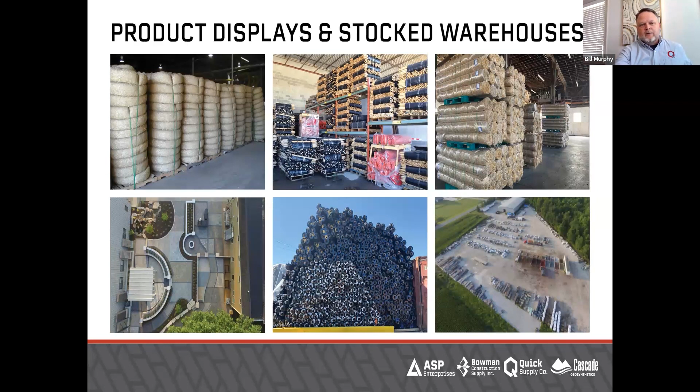Rachel, if you unmute yourself - I have your bio that I printed up, but I don't like to read things to people. I know you as someone from the Midwest who now lives in Colorado, but the engineering world is right in your wheelhouse, and you're an expert in erosion control and vegetated solutions. I think you have your states listed here that you cover, and you know us in all of those states and more. So everyone give a warm at-home clap to my friend Rachel Higgins. We can't hear them, Rachel, but trust me, they're clapping - they're thrilled to see you.

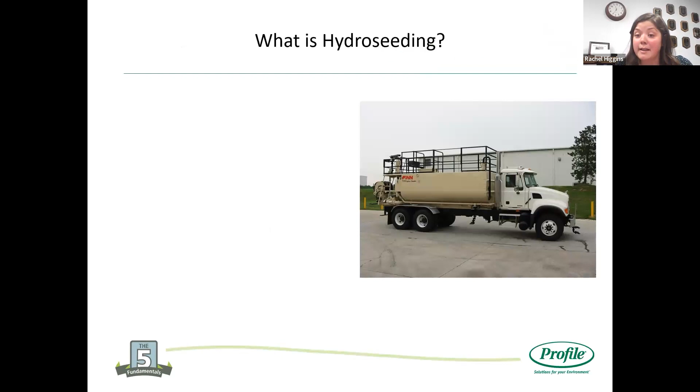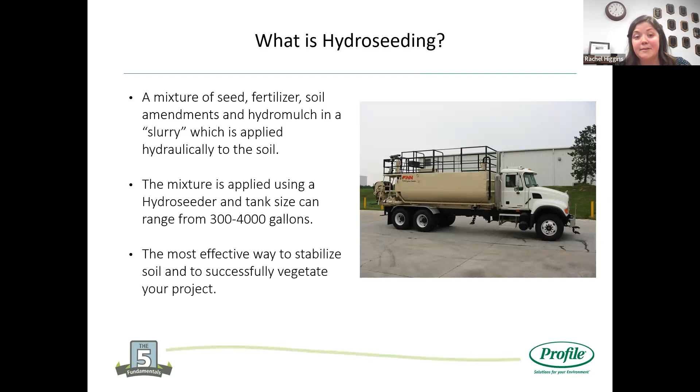The majority of the products we manufacture are hydraulically applied. So what is hydroseeding? For those who aren't as familiar, think of this as a mixture of seed, fertilizer, soil amendments, and our hydromulch, which is mixed in the back of a tank - a typical hydroseeder - and then hydraulically applied to the soil. These machines come in a wide range of sizes, capable of handling smaller residential jobs up to multiple acres, so there's a machine out there for whatever kind of project you're working on. Overall, this practice is a really great way to stabilize and vegetate a site with one application.

So a question for all of you at home, and I hope you speak out loud - if you had to think about it, what's the most cost-effective form of erosion control? Yeah, Bill probably knows.

He's seen this a couple of times, but he showed a picture of some of the BMPs that they stock at their warehouses. There's so many products to choose from, but really when it comes to the most cost-effective solution,

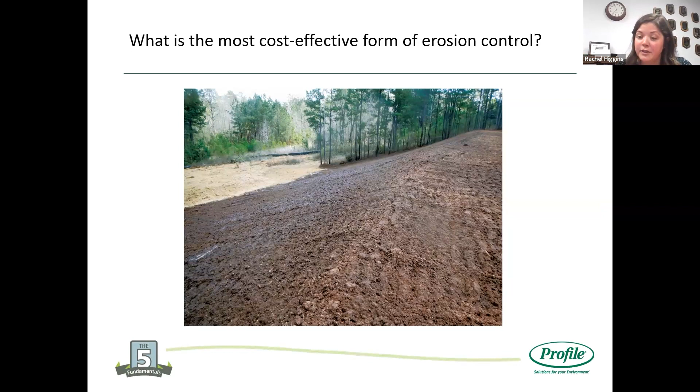what we're looking for is a vegetated solution. So we're using all these BMPs to encourage that or retain sediment, but overall, the most cost-effective form of erosion control is going to be getting vegetation to grow. So vegetation that comes back season after season, those roots are really going to keep everything in place. But in order to do that, we really need to take a look at our soil.

But as I mentioned, we're working on projects all around the world. I know we've got people from quite a few different locations here today. So how do we approach all of these projects? At Profile, we like to follow what we call our 5 fundamentals. Regardless of where you're at, we found that following this process is a really good way to set yourself up for success and eliminate having to go back out and redo these jobs. So that's what we're going to be going through today.

And thanks to the whole ASP, Bowman, Quick, and Cascade team, we've got some great case studies here at the end utilizing this process and these materials.

All right, so starting off, number 1, we really need to take a look at our soil. When it comes to erosion control, I know a lot of it comes down to making those selections and figuring out what's going to be best for the site. But as we just saw, the most cost-effective form of doing that is getting vegetation established. So we really need to take a step back and first address the soil before we even try and develop our seed mix as well as our erosion control BMPs.

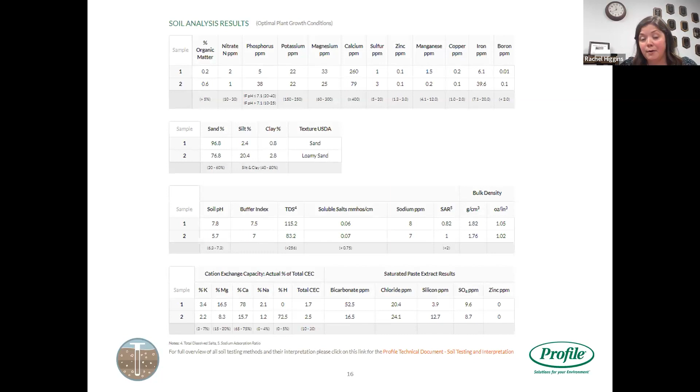But what this analysis is going to look like, we use a third-party lab in Lincoln, Nebraska, and we're really looking for our macro, micronutrient levels in our soil. We want to take a look at our pH, our organic matter, our moisture, our soil type. This can tell us a lot about the growth potential of the substrate or any areas of concern that we can then rectify.

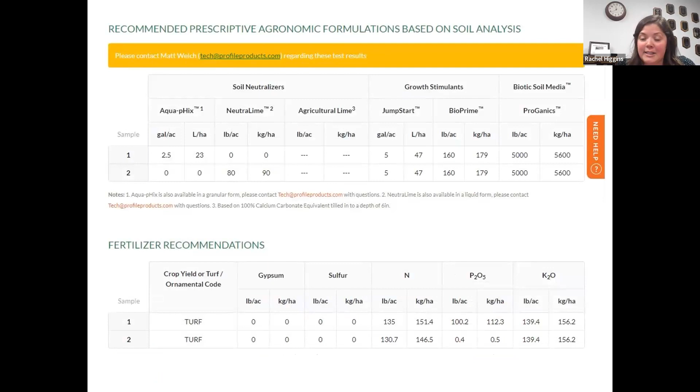And so one of the great things with this solution is we can provide results, but then actually prescribe some amendments to go with that. So again, really recommend getting in touch with your regional rep to go through an example of this on your own. Because let's say we start with the soil test, we know that's our first fundamental. What do we do next? So if we get this soil test back and we see that we are pretty deficient in nutrients or our pH is off, here are the most common solutions used on a majority of job sites to address that soil.

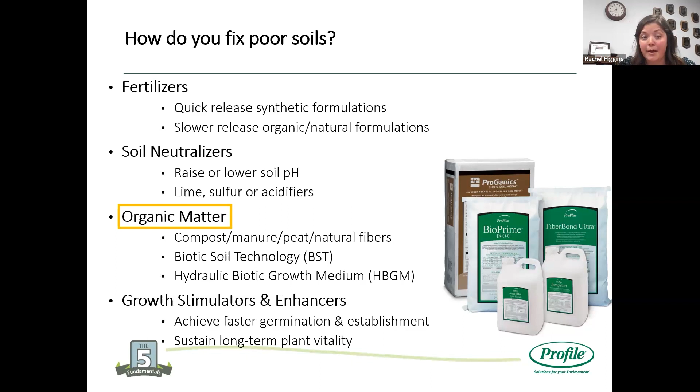And this is what we have on every single project, right? Yeah, probably not.

I wish it would probably make a lot of our jobs easier. Oh, ha ha ha, my laugh is not as effective when I'm muted. I appreciate it, I appreciate it.

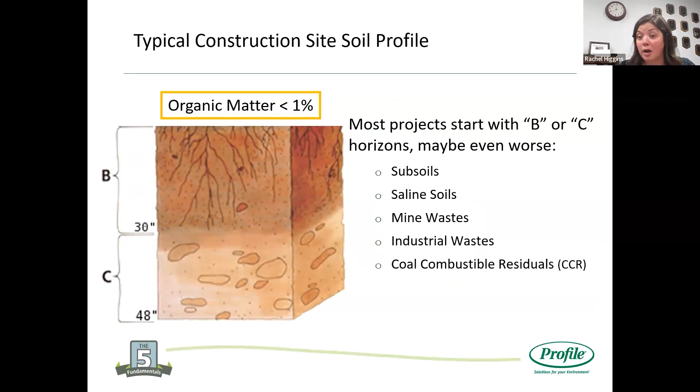Unfortunately, that's not the point on a majority of our reclamation projects. A topsoil layer was never there to begin with. Maybe it was stripped away and taken to another job site. All that to say, when we finish up a job and we're getting to that seeding component, we have less than ideal starting conditions to get that seed germinating.

Another really important thing to keep in mind with organic matter, we know it's a healthy component, a key component of our healthy soil. But if we see this from the USDA, healthy soil has an amazing water retention capacity. For every 1% increase in organic matter, it can result in as much as 25,000 gallons of available soil water per acre.

Like I told you guys, I'm here in Colorado today. I'm sure in most of these regions, moisture is critical to the long-term success of these sites. So we know it's a key component of healthy soil, but there's countless benefits that it can also provide. We know organic matter is important, but how do we actually incorporate that into our project?

Some of the most common approaches would probably be topsoil or compost, still regularly used in the industry, but seeing the need for this led to the development of a new technology, which is a hydraulically applied biotic soil media.

The product our manufacturer calls ProGanics. This is designed as a functional alternative to topsoil and compost, and we can use that same machine that we're using for our erosion control, so it really helps with time of installation. As you can see here, it's hydraulically applied to the soil, much easier to apply on those steep slopes. Since the launch of this technology, we've gotten proven performance equal or better than compost or imported topsoil.

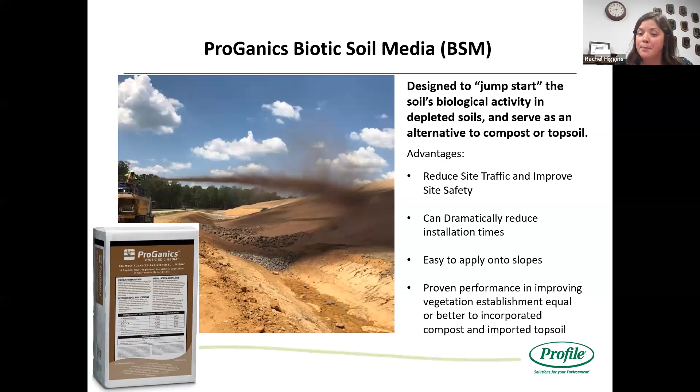So once this product is on the soil, it's going to help rebuild this O and A horizon in place. With this concentrated formula, we can apply 5,000 pounds of ProGanics biotic soil media and provide the same amount of organic and soil building components as 36 loads of rich topsoil. So we can provide quite a bit of time savings of having to haul in and spread all this outside material.

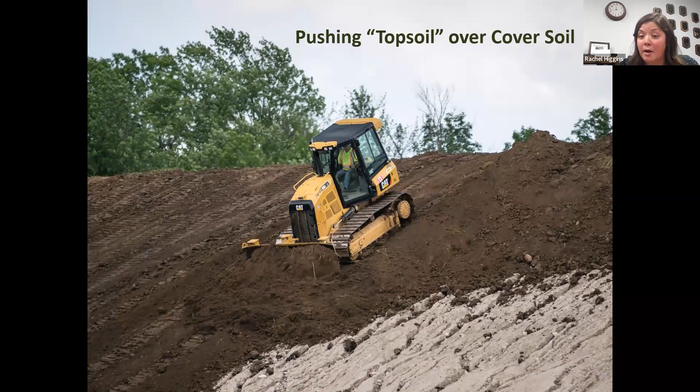So when it comes to sites where we need to improve our organic matter, think of ProGanics. It's another tool in your toolbox and a great option for these sites. Compared to the more conventional methods of pushing out topsoil or blowing out compost, we can now replace that with a hydraulic application. Just showing you how easy this is to lay down. We've got quite a few case studies utilizing this across the country and around the world that we're looking forward to getting into soon.

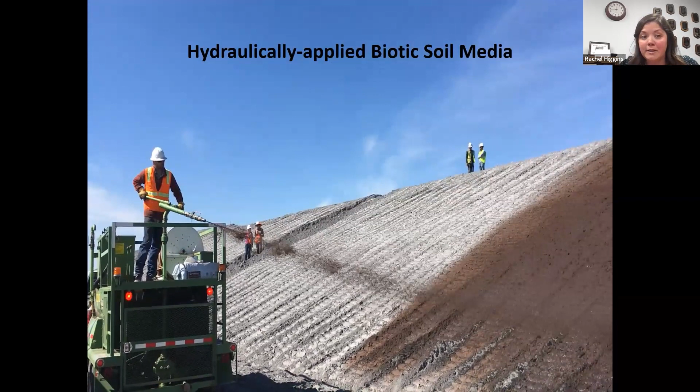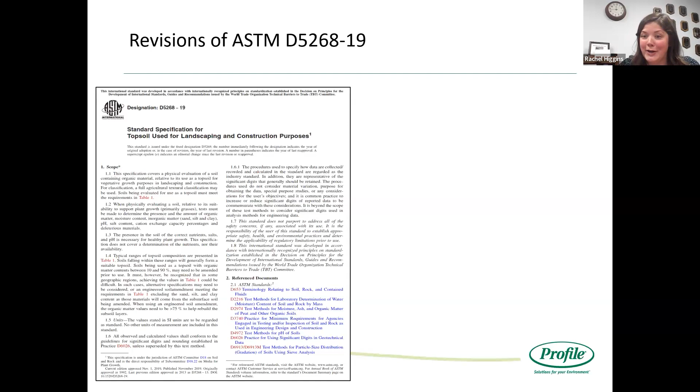Just for reference, in terms of how to spec this product, a lot of DOTs have already started to incorporate this type of technology into their standard specs, but I know we're kind of all over the country right now. For your reference, ASTM International recently revised their own topsoil spec, but they recognize that's a limited resource. So they've introduced and defined a hydraulically applied engineered soil amendment as a functional alternative to topsoil, and ProGanics does meet this spec.

Again, if we have some sites where we're really struggling to establish vegetation, or we know we need to give it a little bit more of a boost to get that germination, consider ProGanics as another tool in your toolbox.

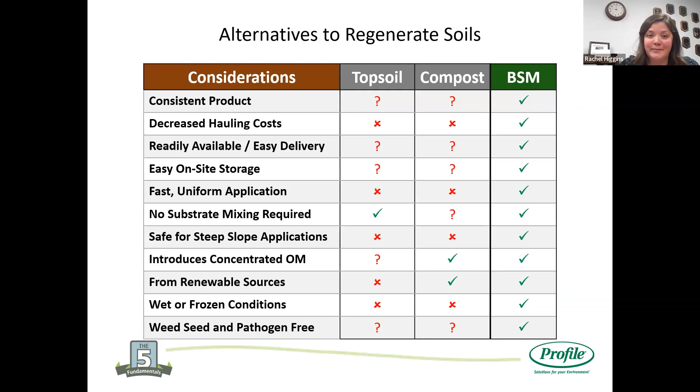All right, so moving along to fundamental number 2: once we've fixed our soil, then it's really important to make sure that the seed we're using is going to be well adapted to our site conditions. There's quite a few things that we should keep in mind: what is our intention, what is the seasonality, what are our site characteristics, and how is this going to be maintained?

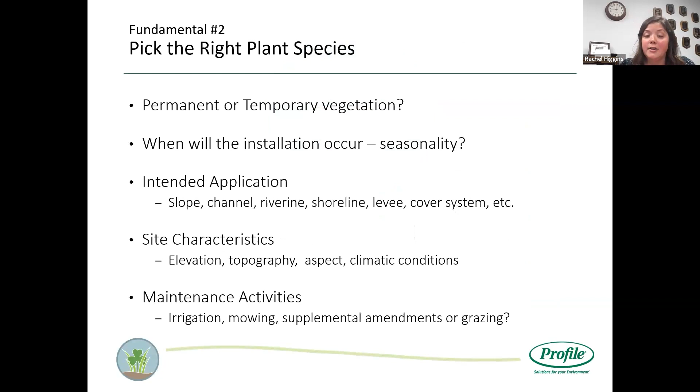There's quite a few things that we need to think about when it comes to that selection, if we have the ability to make that other than following the specification. That said, some things to keep in mind, some things that we certainly want to avoid: making sure that we're not using a mix that's not adapted to our site conditions, using an unbalanced mix, or we can also have an issue with using too much seed, or having too much cover crop in our seed mix.

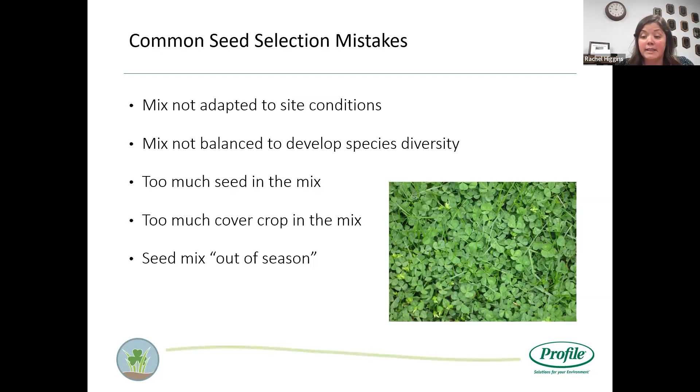From Profile's point of view, a strong recommendation for us is to get in touch with your suppliers and your local experts and make sure that we're using a great mix that's going to be well adapted to your site constraints, as well as the soil that we just tested from that first fundamental.

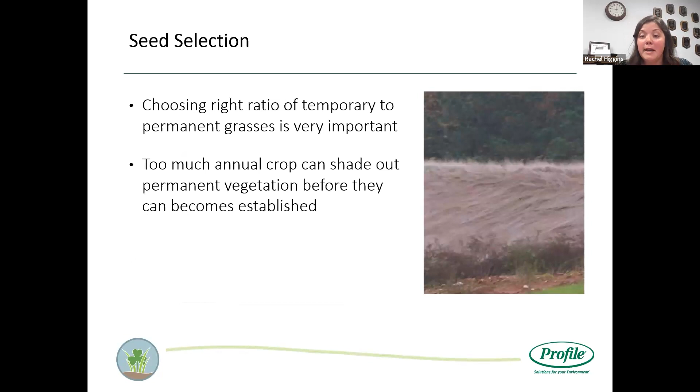Just really want to point out here quickly the importance of that ratio. We want to avoid that quick green effect that can come from using too much cover crop. We don't want that to grow out and choke out the permanents, because then we're going to be back to square one. So making sure that we're keeping an eye on that balance.

This picture, I know it's common sense, making sure that we're using the right mix in the right season, but projects can sometimes get delayed. So if that does happen, make sure that we're going back and dotting our I's and crossing our T's and making sure that everything we're putting out on this site is set up to thrive.

Once we've fixed our soil and then we've made that seed selection, then it's time to start thinking about our erosion control material.

At Profile, we like to think of it as finding a balance between our natural variables and our product attributes. By natural variables, we're talking about your site conditions - our soil, our vegetation, our water. Is this going to be irrigated, or are we dependent on natural precip? Keeping all those considerations in mind, we then need to find an erosion control product that can really complement those constraints.

Certainly, one aspect that we need to keep an eye on is the erosion control effectiveness - how well is this product able to prevent soil loss on our site. Another thing to keep in mind is our functional longevity. This can be really critical if we're going in with dormant seeding or if we're seeding with natives. We want to make sure that we're using a product that can provide that protection for an extended period of time.

Another aspect that we should certainly keep in mind is growth establishment. Because again, from the beginning, we know that the most cost-effective form of erosion control is sustainable vegetation. So we want to make sure that the products we're selecting and using on our job sites are actually going to encourage that growth as opposed to hinder it.

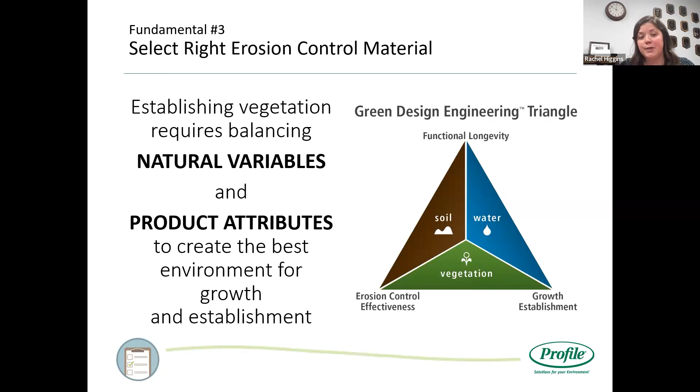That takes us into hydraulically applied erosion control products, or HECPs. HECPs are a great option for finding that balance with our site constraints, because they can be customized to your site-specific conditions. There is a wide range of HECPs available in the marketplace, so you can really help dial down a material that's going to be best suited for your needs, whether that's your slope gradient or how long we need the protection, and they can really help find that balance.

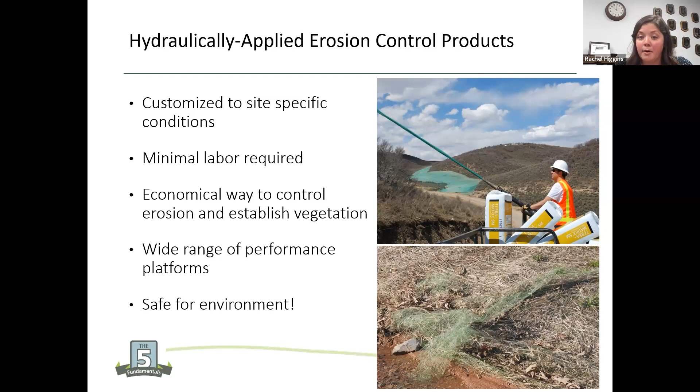This is a really economical way to control erosion and establish vegetation. It's much faster, easier, and safer to get down compared to some alternatives. But certainly one of the most positive benefits with HECPs is they are safe for the environment. All of our products have been tested against ASTM standards and EPA protocols. They're completely non-toxic and 100% biodegradable, so we don't have to worry about leaving behind any netting or staples on our job site.

A little bit more about hydraulics, if you aren't as familiar - think of them as spray-on blankets. Once we mix up this material in the hydroseeder with the water, we can spray it out on our site, and it's going to form a strong and intimate bond with the soil surface. The fibers used to create these mulches have a very high water holding capacity.

At Profile, we manufacture a line of hydromulches from North Carolina that are mainly wood-based, but we also manufacture some products in Rockford, Washington that are straw-based. Both of these options are a great way to protect the soil, but they're going to provide a lot of moisture at that soil level, which we've seen to really help speed up or encourage that germination.

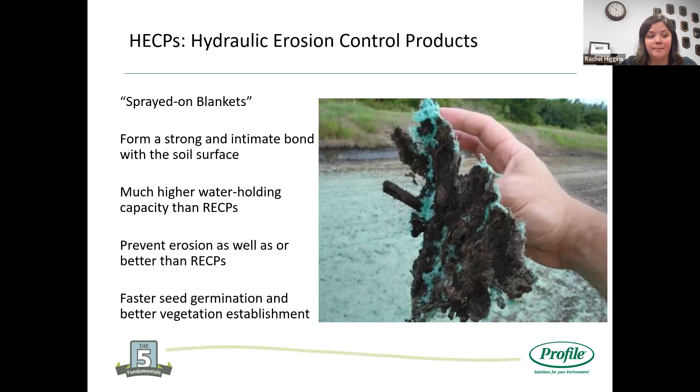Here we can see how that process goes. We're going to get those products in 50-pound bales, mix those up in the back of the tank, hydrate it with our water, and then this material can be sprayed from the tower or the hose out onto our job site.

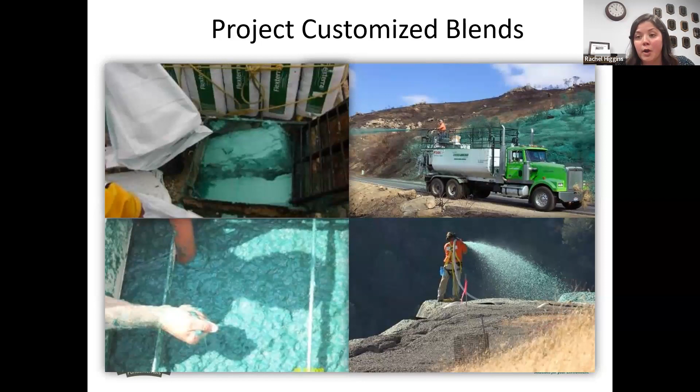So I mentioned that there's a wide range of erosion control products out there to choose from, which is great, but then it can be a little difficult to actually hone in on that decision. So how we make recommendations for these products is through performance testing.

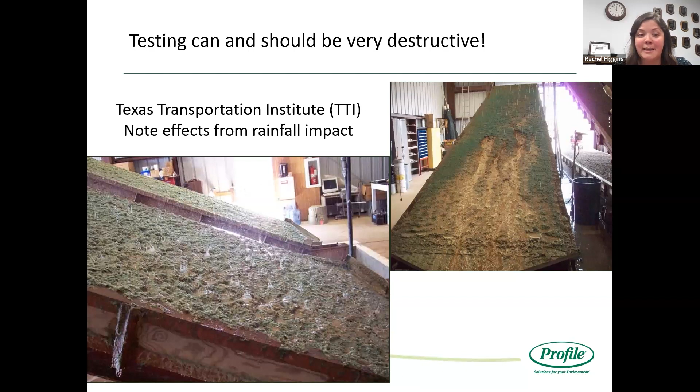So we test all of our products at quite a few laboratories. We really like to use Texas Transportation Institute because they can create some really consistent large raindrops, which again is great to see that destruction in a controlled setting. Because then from there, we can now rate our performance.

So what we have here is a performance profile for these recommendations. Essentially, if we start at the bottom, if we're working on a site where we're not expecting a lot of erosion, it's a pretty flat area, we're seeding at a good time frame, that's where we can go in with the low-end product. At profile, we like to think of it as a good, better, and best approach. So a good option would be something like a profile wood or wood with tackifier.

But as we get some steeper slopes, higher shear stress or velocities, some more erosive concerns, it's time to level up in terms of protection. So above a wood with tack, a better option would be something like ProMatrix, an engineered fiber matrix. But then above that, the highest performing erosion control product in the industry is a flexible growth medium. These products are designed to provide protection up to 1.5 to 2 years and can be applied on slopes steeper than 1-to-1. So there's a wide range of products out here to give you that level of protection needed for your unique project.

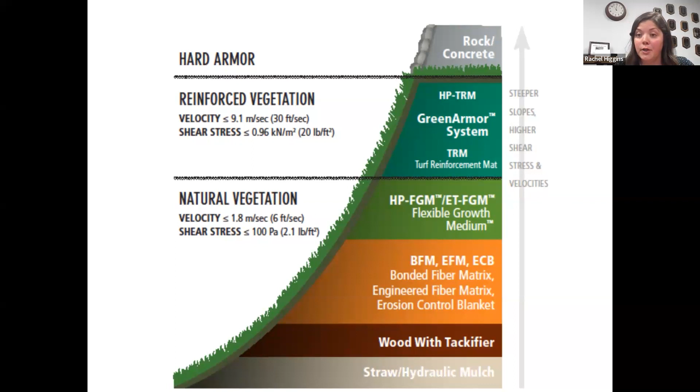So here we can see what product actually translates to that good, better, and best category. Like I said, a wood going up to a ProMatrix if we need a little bit more protection, and then all the way up to an FGM for the highest level of protection from hydraulics.

So a little bit about these products. The highest performing out there is going to be Flexterra. This is a high performance flexible growth medium. Like I said, it can be applied on slopes steeper than 1-to-1. It's going to give you greater than 99% erosion control effectiveness, but it's also providing that protection up to 18 months. So this product is regularly recommended when we're seeding with natives, or if we're going to have some more extreme site conditions, because this can really handle that high level of stress, if you will, on these projects.

But another benefit here is going to be the cure time. This product is going to be immediately effective from when we mix it up. I've got an example later on here today where this is actually applied during rain. So as long as we're still getting that mulch, seed, and soil contact, you're still going to have a fully effective product. But again, some of the environmental benefits here with Flexterra and all the hydromulches: 100% biodegradable, non-toxic, and no netting or staples.

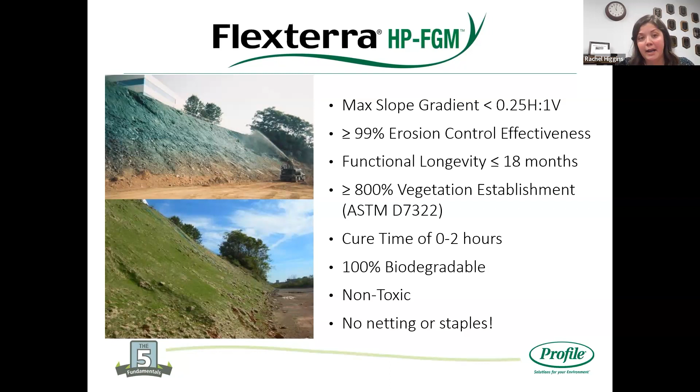So here's an example out in Colorado. We've got these mountains and some pretty steep slopes out here. So it's a little bit more extreme site conditions than I'm originally from Illinois, so you could probably see for about 10 miles straight in any direction. So we need to use a little bit more of a robust product here.

Really rocky slopes here. Notice how much safer it is for the installers, because compared to the alternative, we're going to need to have somebody anchored up here and go through quite a few more safety measures. But this just kind of shows some of the slopes that Flexterra gets used on regularly.

While it'd be great to use the best product on every single site, it's not always necessary. So if we have some site conditions that aren't as extreme, a great alternative, just a step below in performance across the board, would be ProMatrix. Again, this is an engineered fiber matrix. If we notice some of the performance properties here, still very high, but a slight step below from Flexterra.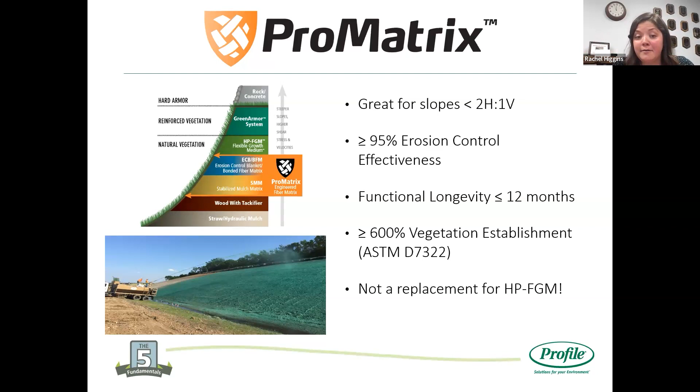So if we've got slopes up to 2-to-1, this is typically the range that we're going to recommend ProMatrix, but it's a great alternative and it could be a good option for your budget as well.

But I really want to point out some of the other benefits with hydraulics here, and that's how it gets installed. So when it comes to reducing soil loss on our site, where we can really come in and make a big impact is with our C factor of our mulches, so how well they perform, but as well as the practice factor, so how our soil is prepared before we seed.

Simple practices such as rough grading or cat tracking our slopes can actually help reduce potential soil loss. So if we look here on these slopes, they're cat tracking, perpendicular to the slope. We don't want to put any rills in the slope before we even seed, but really that's going to help slow down water if we have a precipitation event as it goes down the face of the slope. Once that's been prepped, we can then hydromulch with, in this case, ProMatrix. And we notice that it can get into all those divots and really bond with the soil.

But the hydromulch, in addition to that soil prep, notice as we start to get that grow in, those cleat marks are really going to add pockets for moisture retention. So when we do have proper soil prep here, it's going to help encourage that faster germination where we can get that moisture. So slowing down water as well as retaining it. Great option here. And again, hydraulics are a great fit for that because it can really bond to those uneven surfaces.

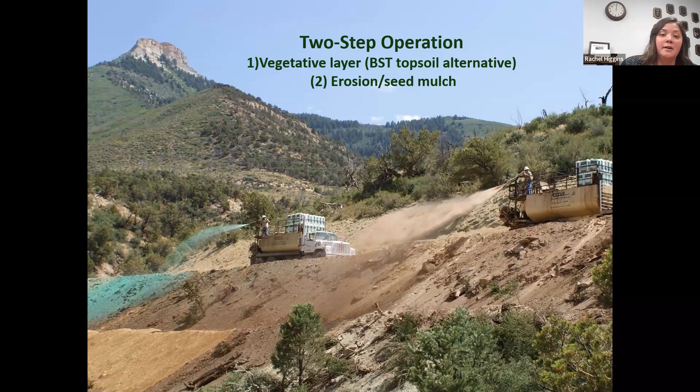So with ProGanics, you can apply it below sod, hydromulch, blankets, but we would want to make sure that we are protecting that layer. So here we can see that two-step installation right here. So that first truck spraying out ProGanics, followed up by an application of Flexterra. So this is really going to provide you superior results, but it does require that two-step.

So with that in mind, we did get quite a bit of feedback once we launched that two-step solution. We really like it, but we think it can be better. So we developed and launched a newer product called ProGanics Dual. This combines the soil building components of ProGanics BSM with the erosion control effectiveness of ProMatrix.

So remember that good, better, best. This is going to be kind of in that better category. So it's not going to work for the most extreme site conditions. In that case, we'd certainly want to go in with that two-step approach. But ProGanics Dual can really provide a great option for some of those mild to moderate conditions, because here we can provide the soil building components and erosion control protection in one pass.

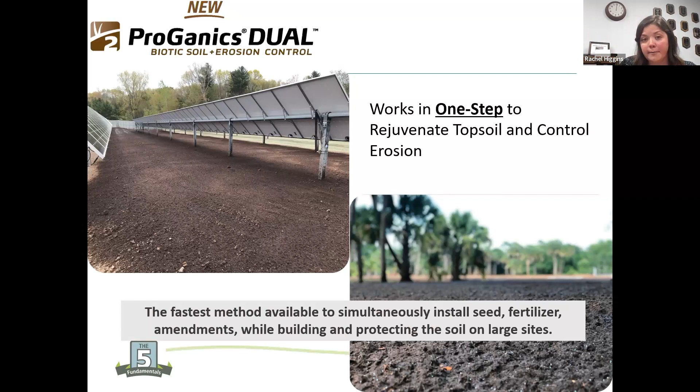And this becomes pretty popular in those areas where we've got limited access, or if we have limited access to water. So here's an example of a ProGanics Dual application. This is on a solar field. A lot of solar construction going on right now, but once we get out there and get those panels up, there's not a lot of time to go back and reseed these areas.

So we needed a one-step solution to get in and out of this job site. This is actually a winter application.

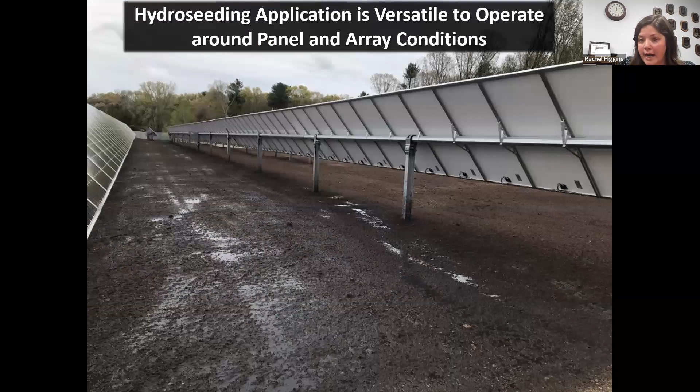We did a soil test and saw the organic matter was low. We've got some pretty flat areas here, but we are going into the winter months, so we wanted a bit more robust protection. This was a great option for ProGanics Dual.

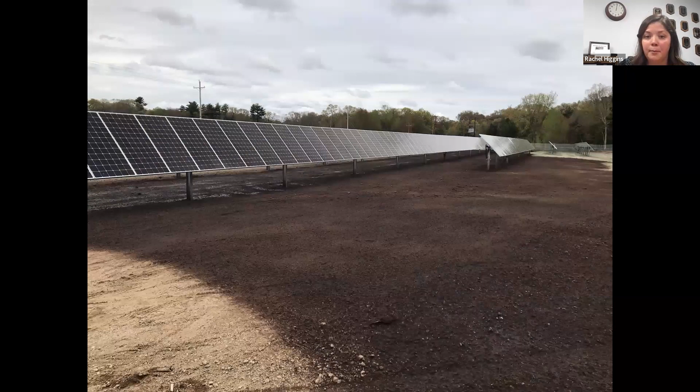This is going to be a rich brown color since we've got those bark and wood fibers from the BSM and the ProMatrix material combined.

With that said, I just briefly want to say it's not a 50-50 mix of ProGanics and ProMatrix. I do not recommend trying to create your own combo product. We had to do quite a bit of R&D to make sure we had the good mix here, but just conceptually think of the soil building of ProGanics and the erosion control effectiveness of ProMatrix.

So once this has been installed—again, this was installed in the winter—here we are the following spring, so everything's still pretty dormant. But if we come back that summer, looking through the fence, we've got a great stand of vegetation.

So for those sites where we can really only do one pass, and time and water could be a concern, think of ProGanics Dual as a good option for your site.

In fact, I'm out here with Bowman in Colorado, and water is pretty limited, so we're working pretty closely with the team here to use quite a bit of Dual in this marketplace. It could be a great fit for where you're at.

And Rachel, I want to join you—thank you for showing the solar. That's a beautiful project. And you and I were together last week in Wichita, talk about dry. So they see a lot of value in retaining moisture and trying to make the soil healthy.

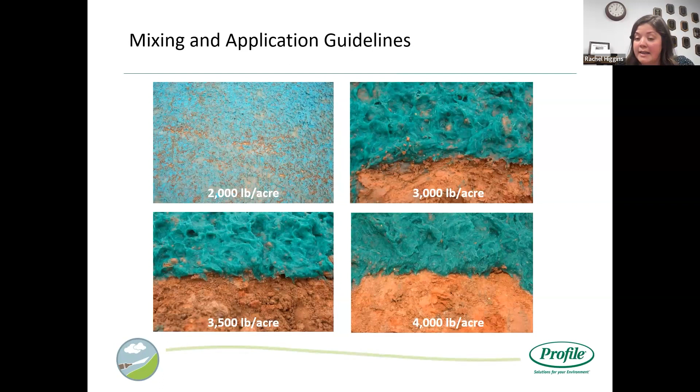But here's an example of some of these application guides that we have. It goes through a step-by-step process on how to load the product, when to put in our seed and fertilizer, and we're also providing some visual guidelines for that application rate. Application rate—it's really important that we're getting that full coverage. With hydromulches, it's really important that we're spraying from 2 directions.

So if we are specifying hydraulics, make sure we're specifying that they spray from 2 different directions, or make sure we're using a contractor well-versed in these type of installs. Same goes for inspectors. If we have anybody out here, it's really important that you're familiar with the product so you know what to look for when you go out on those job sites.

So after installation, we're almost done, but it's really critical that we have some follow-up inspection and maintenance. There's a lot of design and everything we can do up front to make it the best it can be, but we can't quite control the weather yet. So it's really important that we're getting back out on these job sites once they've been installed, looking for any potential washout areas or making sure these products are holding up. That goes for all BMPs, not just hydraulics, making sure the solution we put out on this project is working as it should.

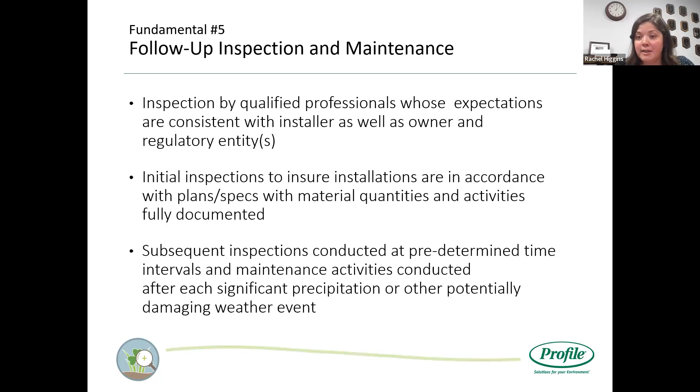And if we do have any areas of concern, we address them before they escalate into a larger erosion control issue. The best way to ensure that actually happens is if we specify it up front. So again, for those specifiers out there, I'm talking to you, be sure to check out erosioncontrolspecs.com. You can really quickly add that inspection section into your specification, detail who's qualified, and that way we can avoid having to go back out and redo these projects.

And with that, now that we've gone through those 5 fundamentals, I really want to share some great case studies. First, thank you so much to the team for sharing some projects out on the road. I appreciate you guys all listening, but I know you're really here for the pictures, so I want to show some results.

So going through this 5 fundamental process, let's take a look at a couple case histories throughout the US working with ASP, Bowman, Quick, and Cascade.

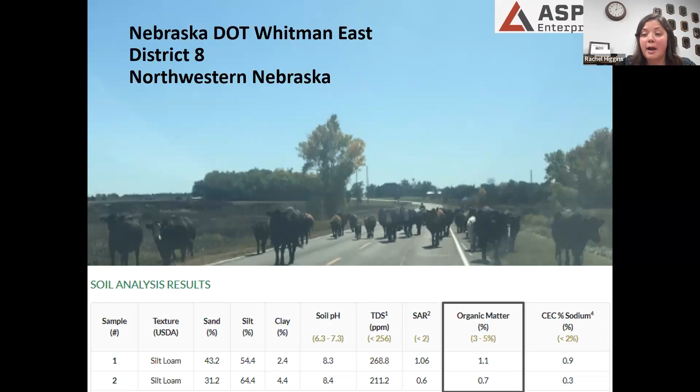An ideal range is 3 to 5%, but depending on where we're at geography-wise, that ideal level certainly is going to vary. But here we know it is pretty low, and we certainly want to boost that organic matter to encourage germination. So this was a great opportunity for ProGanics.

So from that soil test, we knew we wanted to bump that organic matter up. Here we can see part of that installation - really easy to just drive down the road and shoot that product out on the shoulder. This product is an engineered product, so it's going to be consistent bale after bale. But in this situation, they could even just set the pallets out a couple miles down the road to get a new staging area to mix and continue going along.

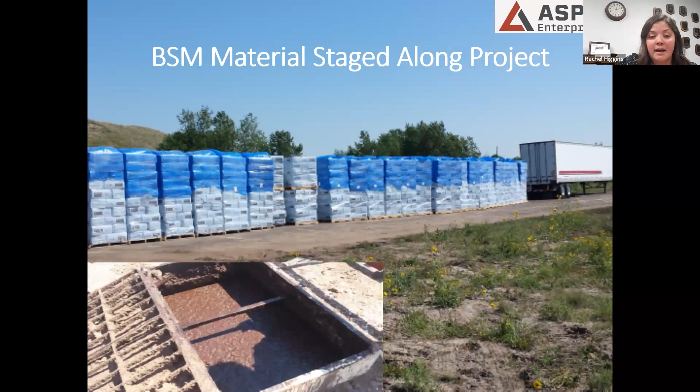Once they mix that up, hydrate it with water, our seed, and any other amendments, then they can just spray it out onto the soil. They were able to do about 25 miles in just 2 days - able to spray this all just going down the road. And I know there's a lot of traffic in Nebraska, but they only had 1 lane closed for a little bit. So a really big benefit, all jokes aside, for uses in bigger metropolitan areas where we can get this product out, move on, and improve our worker safety.

So once we put out the ProGanics, it's time to protect that seed and soil. In this project, what was specified was blown straw as well as some biodegradable blankets. I like to show this because it shows that ProGanics can be used with a wide range of BMPs. So once ProGanics was out, they blew out the straw.

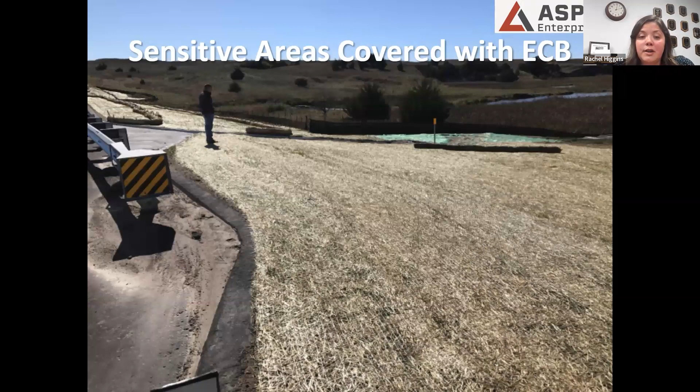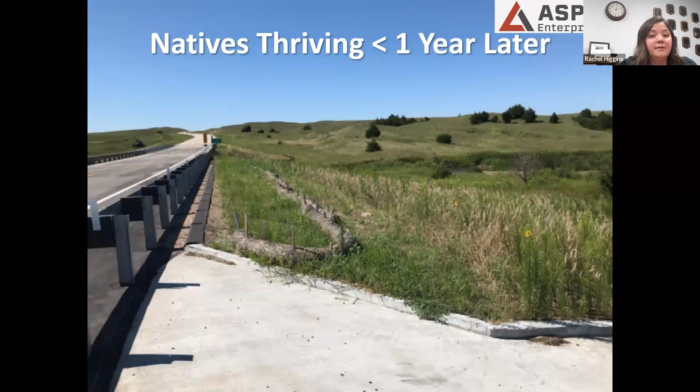And then in the sensitive environmental areas next to a stream, they went in with a biodegradable net blanket. This was all seeded with natives, and here we are less than a year later. Natives are thriving already in that short growing period. If we look here, we can note the bright green in those areas that was reclaimed with ProGanics. So really great growth here, able to close out that project. I think this was one of the first ones, and now Nebraska DOT regularly uses this type of technology.

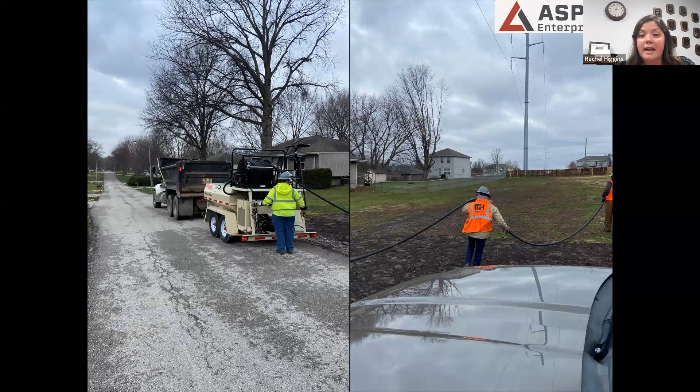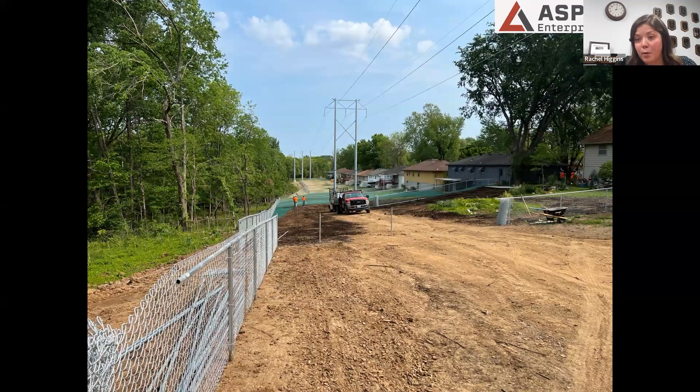Hopping over to another region, here we are down in Missouri, just southeast of Kansas City. Evergy Utility, this is still ongoing. They've been doing a lot of upgrades to their transmission lines. But through that whole process, once they go in and make those upgrades, a majority of these lines went through miles and miles of people's backyards. Once that was all completed, they then needed to return these areas back to what they were prior to construction. And with that, they updated the lines, then they had to reseed these areas.

And in a lot of places, they were actually reinstalling people's back fences. In this picture, we can see way in the back where they've started, and they're just moving along to reclaim these areas. So when it came to selection of a product, there were quite a few things to keep in mind. They had no idea where they were going to be at any point during the year. They were going to be working through quite a few different seasons, and with that, quite a bit of precipitation.

But also, as we can see here, once they seed a job, they're reinstalling a fence. So getting access back to the site at a later date is going to be pretty much impossible. With that in mind, they wanted to use a really high performing product to ensure that everything was going to be set the first time around.

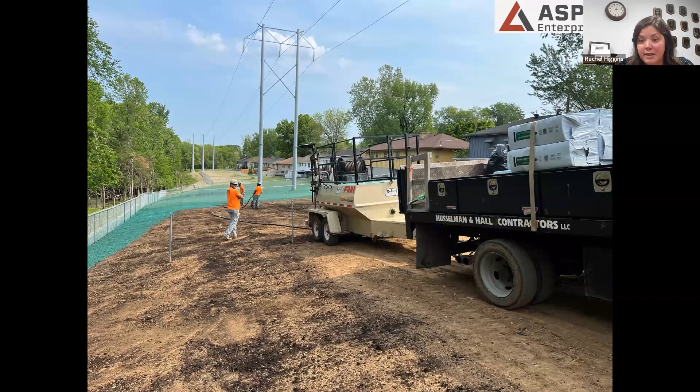So for this project, they were reclaiming everything with Flexterra. This is that good, better, best product. It's a flexible growth medium. It's going to provide that protection up to 18 months. And why they used Flexterra is they knew they could put this down and it was going to provide that extended protection regardless of the season that we're working in.

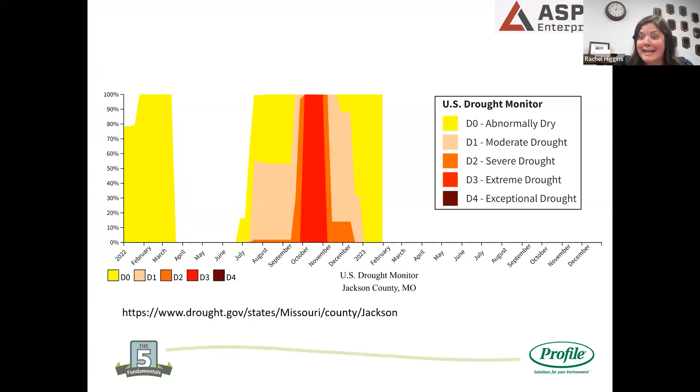So that was last summer, and here we are this past January. Certainly one of the benefits there, Flexterra could be used during the early spring rains, but then it was able to keep everything in place through those drought conditions throughout the summer. Going back this past January, thanks to Todd for taking these photos - I don't know about you, but I can't see what was disturbed and what wasn't. It was able to keep everything in place until we got to the right growing conditions for that to take off.

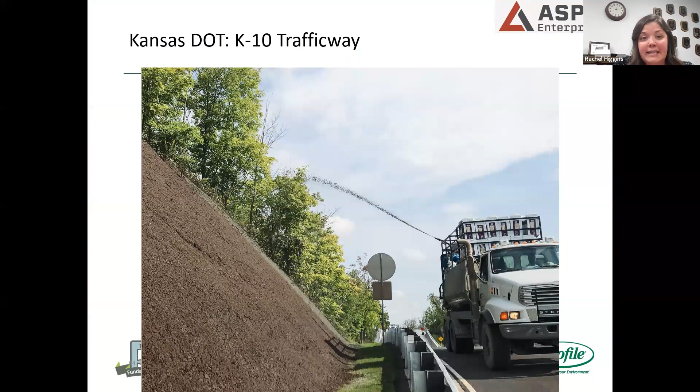Now, a little bit further west, actually in Kansas - I know Bill likes to give me a hard time for not knowing if I'm in Kansas or Missouri - but a little bit further west in Kansas, this is just east of Lawrence. This was a K-10 Trafficway project. This project is a little old, it was originally installed in 2015, but the reason I want to show this one is in that region, some of the major issues they're dealing with in terms of revegetation is the soil type.

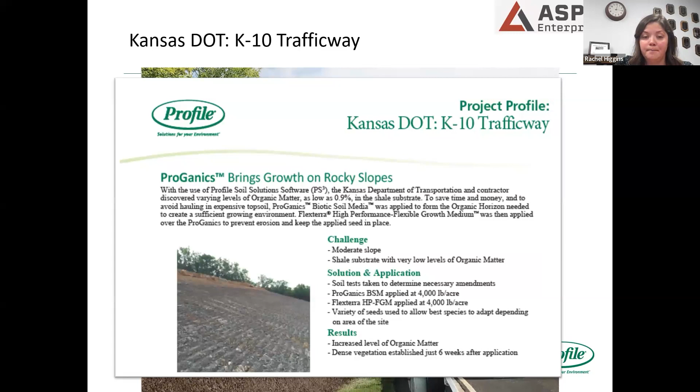They had a really long, moderate slope, but a lot of the substrate there is shale. So trying to find something to grow in that area so that we could have that long-term erosion control protection, for this site we did a soil test. Some of the organic matter was coming in at about 0.9%.

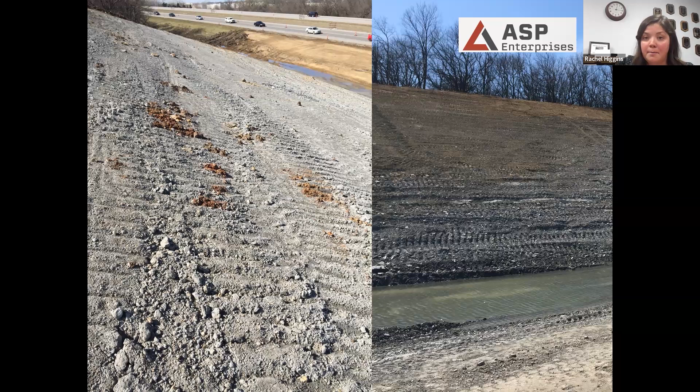From that, we're able to prescribe ProGanics and Flexterra for the slope. Here we can see some of the prep in the initial install back in 2015, and then about 6 weeks later we have a great stand of vegetation coming up. I was actually just out there last week.

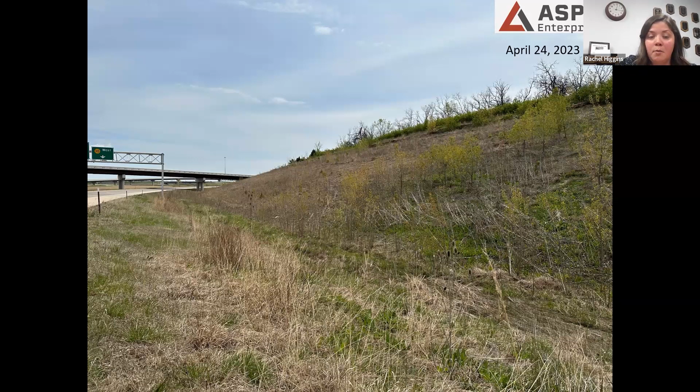Next, hopping around, going up to Waterloo, Iowa - thanks Steve for these pictures. This is the Lost Island Water Park expansion. Out on this job site, they had about 20 acres to vegetate, so given these slopes and the time of year, we went in with Flexterra. If you're familiar with that water park, it's now referred to as a green mountain next to the park - a great way to really stabilize these areas and those long slopes. With 20 acres going in with a hydraulic solution, they're able to sequence and move on, getting that all down quite a bit faster.

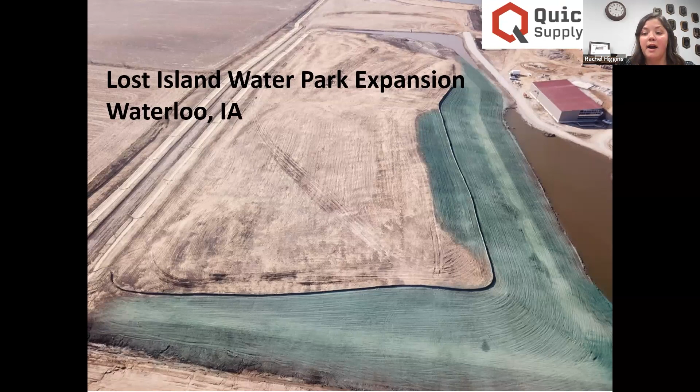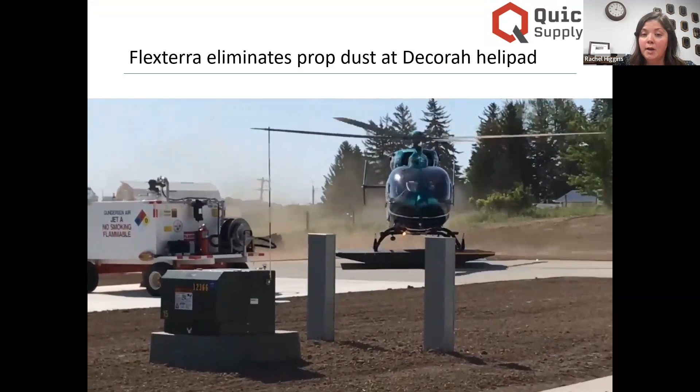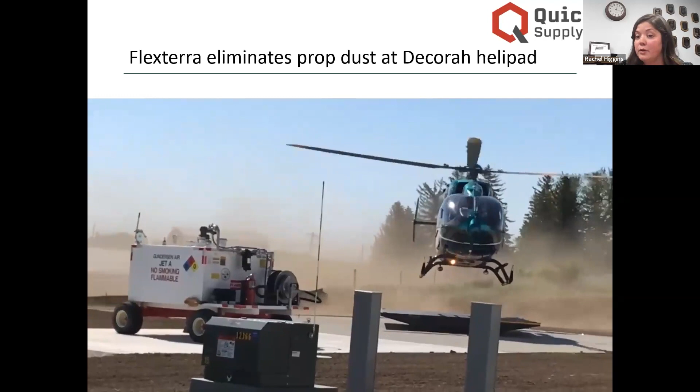Another one up in Iowa - this was a helipad. When it comes to airports or areas where we're worried about foreign object debris, hydraulics are really a great option, because in situations like this, or even with mower blades, we want to avoid any netting or staples getting ripped up, which is highly likely in these situations. Flexterra was recommended here to eliminate dust, but also encourage vegetation establishment.

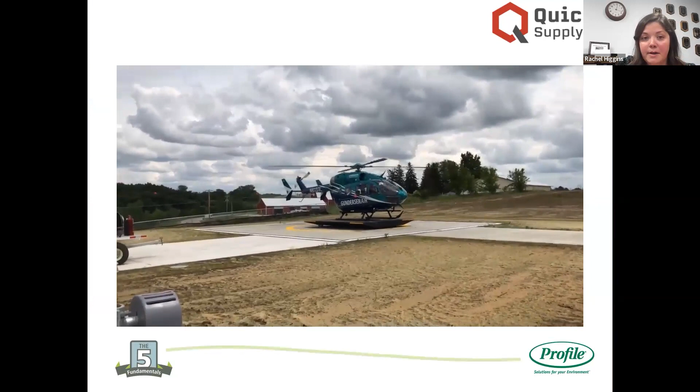Compared to the initial video, hopefully it's not coming in too choppy for you guys. Bill's given me a face that it is, so I'm just going to keep going.

But we could see that there was no dust. Flexterra was really there to help keep the dust down in those areas, certainly safer for the helicopter taking off, but it's also able to encourage that vegetation, which is going to provide longer term erosion control protection.

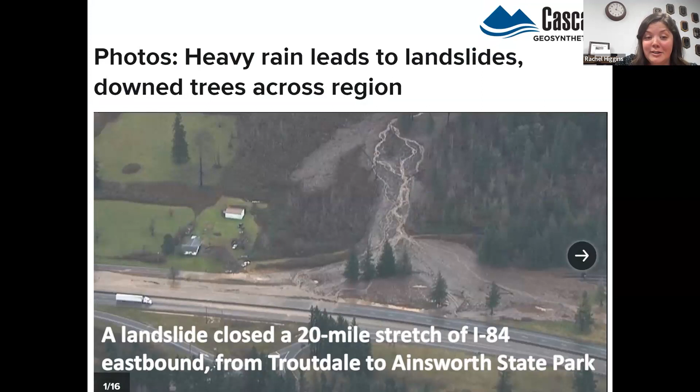Moving further out west, thanks to Travis for these - this was a site out in Oregon. Heavy rain led to landslides and down trees across the region. This had closed about a 20-mile stretch of I-84 eastbound near Ainsworth State Park. As we can see from this news article, it's a pretty rough starting condition, and certainly classified as emergency work for this project.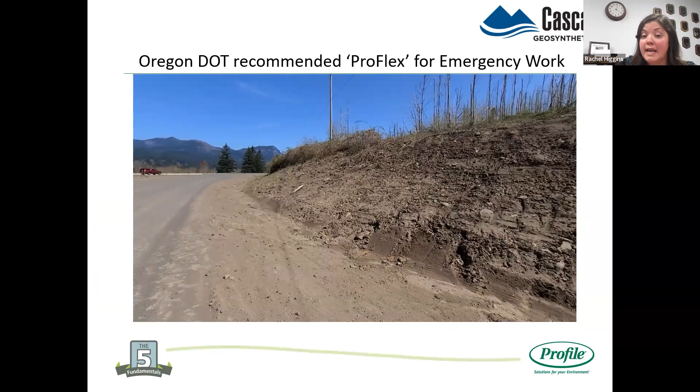In this video here we can see some of the substrates we're working with. In Oregon, we routinely use ProGanics and Flexterra together, that two-step solution, to really help provide faster germination and long-term protection. Oregon DOT on this emergency work recommended the use of ProFlex - again, ProGanics and Flexterra - to quickly stabilize and vegetate these areas where that slide occurred.

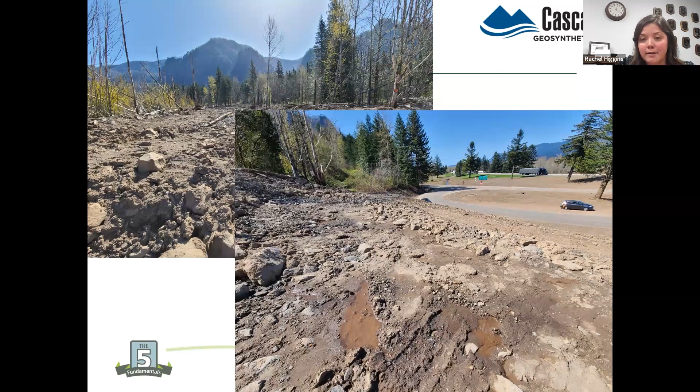As you can imagine, there was a bit of dirt work and prep needed before we could go back in and seed. Here are some of those starting conditions, or the prepared conditions before we went in with the seed. From there, the first application was with ProGanics, getting that down, and then securing these areas with Flexterra to really secure everything until that seed can take off. For emergency work, making sure we're using a high enough performing product to really stabilize these areas.

This is used regularly for fire work. In this case, it was a landslide, but just keeping that in mind as an alternative. In some cases, Flexterra has just been used without seed, just as dust suppression. Getting a quick product out there, hydraulics can really help provide that solution.

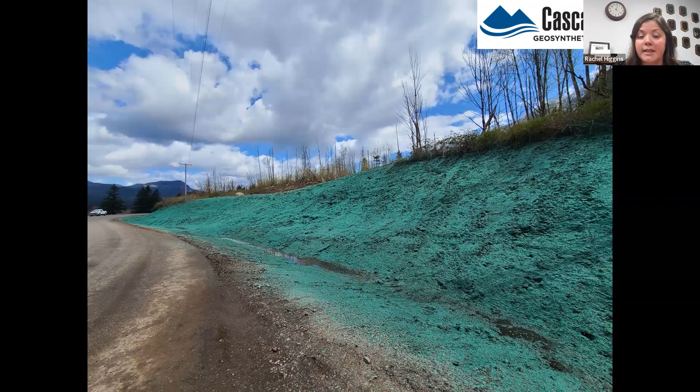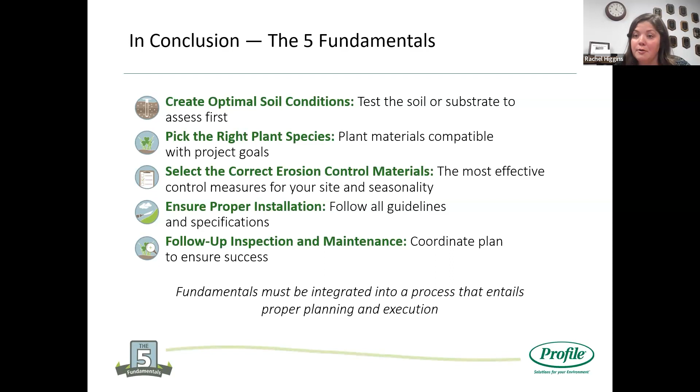We really recommend following this 5 fundamental approach for getting sustainable vegetation on your project. Check out profileps3.com. This website was really designed to follow those 5 fundamentals, where we can help facilitate soil testing, as well as product recommendations, along with application guidelines to ensure our products are getting mixed and applied appropriately.

Also, another tool we talked about was erosioncontrolspecs.com. This is where you can generate a CSI formatted spec in a branded or generic version. We also have a table where you can compare products and their performance properties to determine what's going to be a good fit for your site.

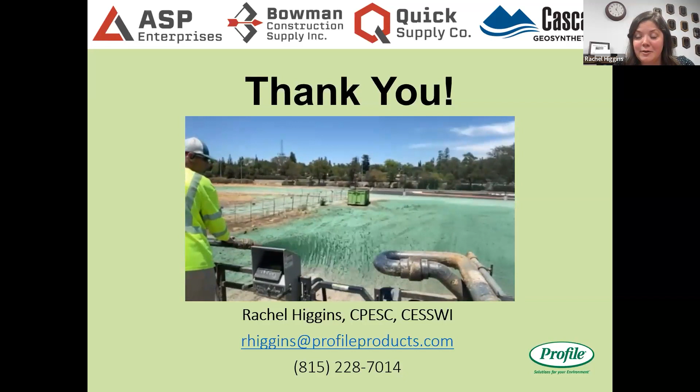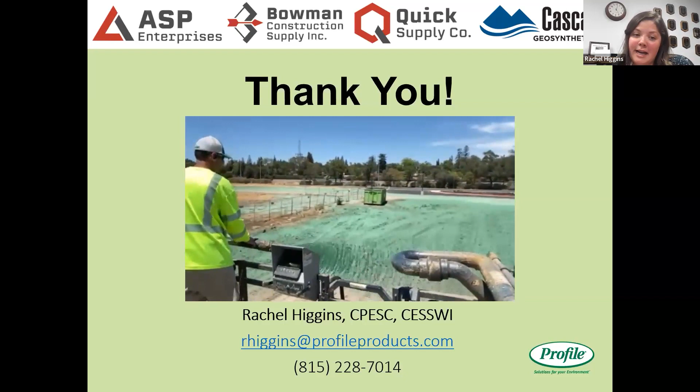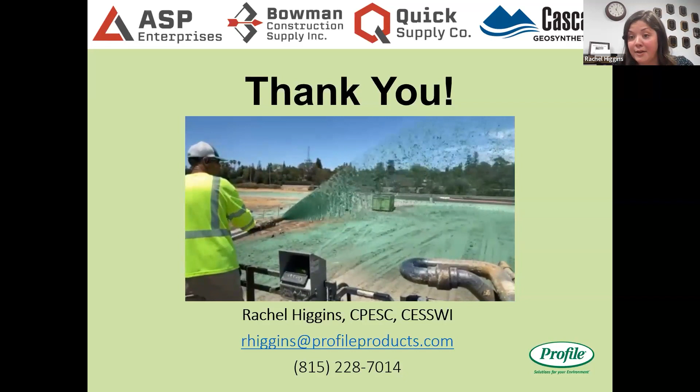I think it's great that you mentioned ProGanics. My friend also asked, what does ProGanics derive from? Great question. ProGanics biotic soil media's main components are thermally refined bark and wood fibers. I stress thermally refined because these wood fibers have been exposed to high heat and pressure, which eliminates any potential weed seeds or pathogens getting into the product. So it's thermally refined bark and wood fibers, which is the main driver for that organic matter component.

From there, we load it up with soil building components: biochar, endomycorrhiza, humic acid, seaweed extract, as well as a cross-linked polysaccharide biopolymer, to help with the hydraulic application. I'd love to send you more information, I just didn't want to go too heavy in the composition there. But really, the thought process is to provide high organic matter and soil building components, so compared to hauling in outside material, the paradigm shift is that we can actually rebuild it in place over time.

You are preaching to the choir with Pat. Pat leads our Iowa Stormwater Education Partnership, and she is an expert on, well she would say she's not, but she is an expert on all things soil health, plant health, natives, water quality. She leads all of those efforts for us, so she's a really great person for you to know, Rachel. I'll share her contact information with you, you will definitely want to follow up with Pat. Pat's been a friend of mine in the industry for a very long time.

Look forward to it. I did have another question someone asked me recently. When we talked about HGMs, you do a good job defining acronyms, by the way, a lot of people in our profession don't. You hear ECBs, TRMs all the time, and we get so used to speaking with other experts in our industry that we assume they already know them. But when we do these webinars, you've learned this too with big conferences, who knows who's in the audience? We have 92 participants here, and there will be another 100 and some that watch the YouTube channel, which I'll mention again, all of our webinars are recorded.